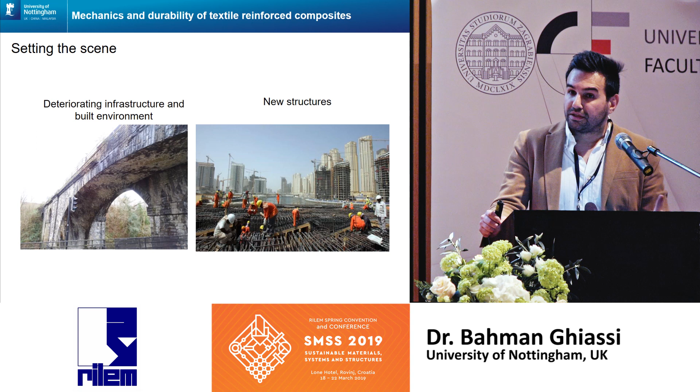We are all aware of the two big and important challenges of the construction sector today. One is the deteriorating infrastructure and built environment, and we need innovative and effective strengthening and conservation strategies so we can extend their life and ensure their safety. We also have new structures and growing construction development, especially in developing countries. For both of these challenges, we need new materials, efficient materials, and sustainable materials.

Considering recent sustainability, durability, and resilience considerations, we need to be sure that these materials are cheap, sustainable, durable, and available locally and globally. This is, I think, one of the biggest challenges of the construction sector at the moment.

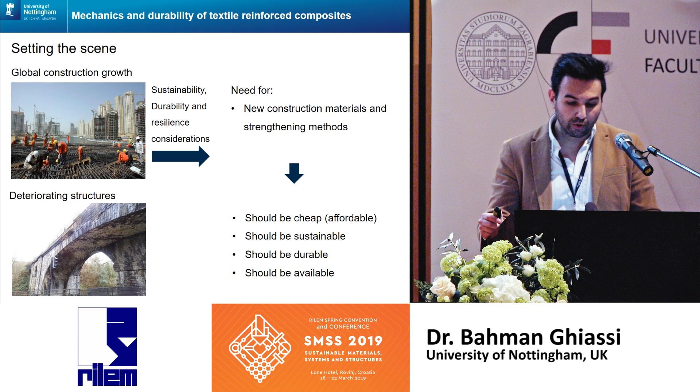For that, happily, we have several new opportunities and new materials. We have alkali-activated materials - there are a lot of RILEM committees on this topic and on their durability. We have blended cements, fiber-reinforced concretes, and textile-reinforced mortars. So we have a lot of options at hand at the moment.

But all of them share some challenges - the variability of the properties of these materials. All of them have a wide range of variability in properties, which makes it difficult to control the durability and quality. Also, there is a lack of understanding of durability of all these materials. That's the reason there are a lot of RILEM committees and a lot of articles and publications on these subjects during the last years.

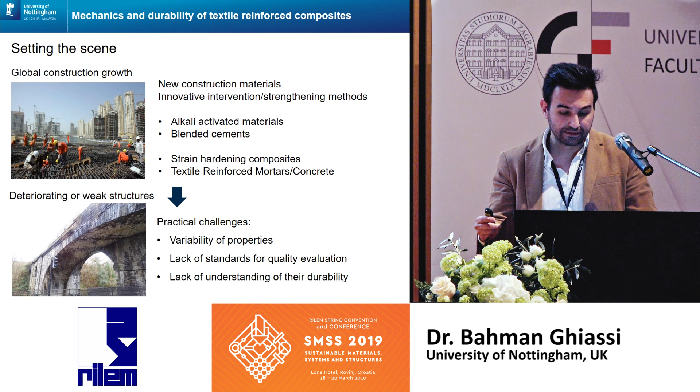If I want to talk a little bit about textile reinforced mortars, which I personally worked on and used for strengthening of masonry structures - but these materials are also applicable for construction of new structural elements, such as light shell elements. So it's not only limited to strengthening applications.

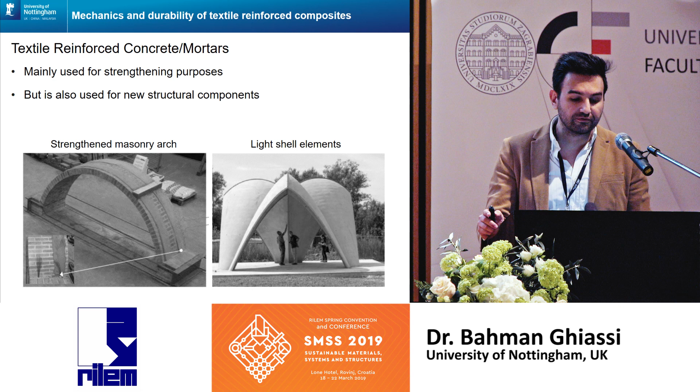So what are textile reinforced mortars? We have a similar thing in fiber reinforced concrete, but the difference is that fiber reinforced concrete consists of short fibers. Textile reinforced mortars are usually long fiber grids embedded in an inorganic matrix that make the final composite material, which we call textile reinforced mortar, or fiber reinforced cementitious matrix, as it's also called in the literature.

We have a wide range of textile types and variations - glasses, steel, basalt, natural fibers - and they come in all ranges of configurations: unidirectional, bidirectional, welded, woven, 3D, auxetic. So there's a large range of fibers available in the market at the moment and being used in practice.

Then we also have a large number of matrices - cements, geopolymers, which are usually used mostly for application to concrete structures, and limes and pozzolanic limes with short fibers, which are more interesting for application to strengthening of masonry and historical structures. As you can imagine, combination of these two leads to a wide range of mechanical properties, durability, and quality, and makes it very difficult to control.

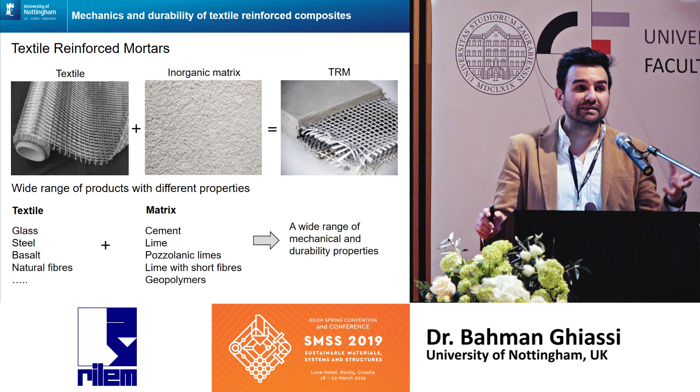And if you think about using this for field application, there are more complexities at hand - the substrate condition, the on-site application condition, the workmanship, the curing conditions. All these can affect the performance of these materials. And we don't know if we apply them today, are they going to work as we want or expect or not?

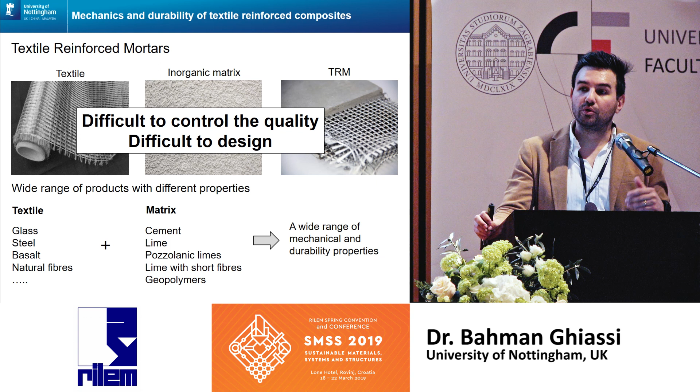So the question I asked myself, and we asked ourselves before we started this research, was: can we control or predict the performance of these systems in service? Can we understand how all these parameters can affect the performance of this strengthening system during the service life of the structure?

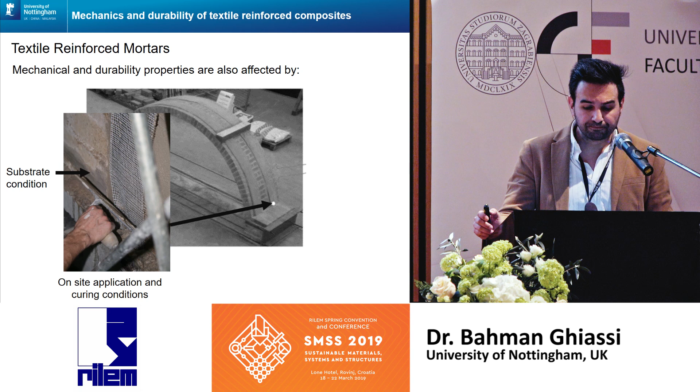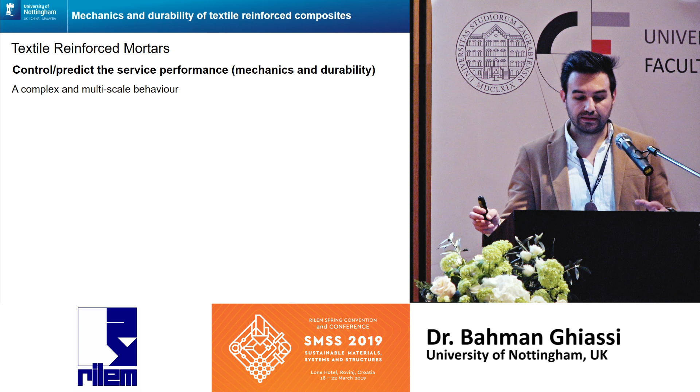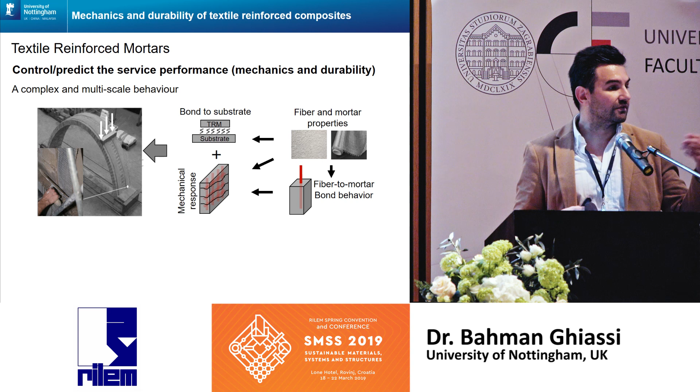To answer that, we have to pay attention that this is a highly complex, multi-scale problem. If you look at the structural application, we have the mechanical response of textile reinforced mortar and its bond with the substrate that controls the behavior of the strengthened system. If you go a scale below that, we have the mechanical properties of the fiber and mortar.

And the interaction between them that controls the behavior at the upper scale. If you go a little bit further inside that, we have the chemistry of the binder and the fiber, and the interaction between them, the transport properties of the binder that control the mechanical response, and finally the durability as well. So if you want a clear understanding of how these materials work in practice, we need to really understand all these scales and how they are linked to each other.

And then we have also the effect of processing method, the effect of curing method, and the effect of environmental conditions, each of which can have effects on some of these scales and globally affect the performance of the final structure that we have.

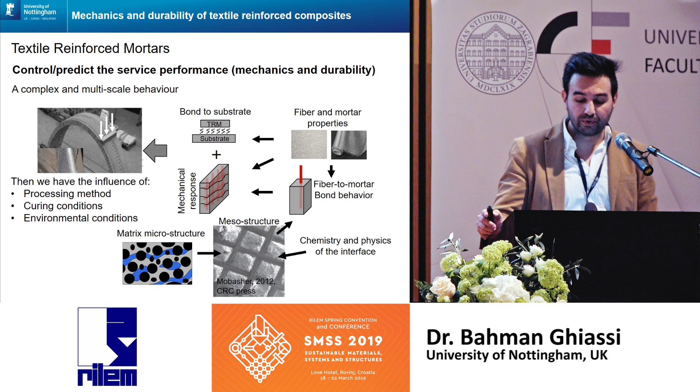So if you go to the literature, we see a quite large number of studies on this topic, on the mechanical characterization of textile reinforced mortars and their application to masonry structures. I think the most notable one is the experimental results of the RILEM TC250 CSM, which I also had the honor to be involved in and work on.

The rest of the studies, as I said, mainly cover the larger scale testing and the mechanical characterization and structural characterization tests. Because we are structural engineers, we only care about what is the tensile strength, what is the fracture properties of our material, and then if it's working well in practice or not.

So there is really a lack of standard testing methodologies at a smaller scale for these materials. There is a lack of studies that combine all these scales together to clearly understand how the behavior is affected. There is a lack of material-structure-property links in these systems. And also there is really a lack of durability studies on these systems.

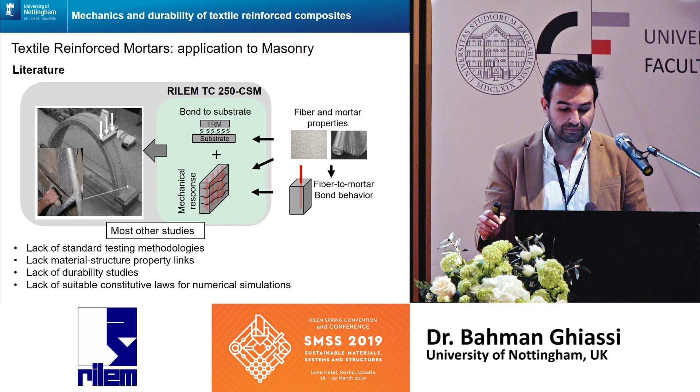I know there have been a very few recent studies on this topic, but we still need to do a lot more research. The available studies are really, really few at the moment.

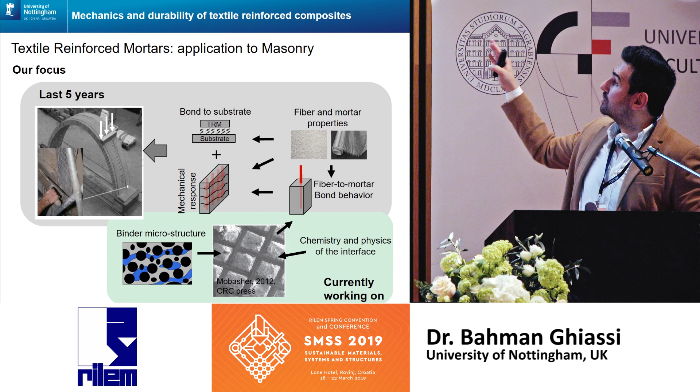So what we have been trying to do was actually to cover this gap and try to somehow connect all these scales together. In the last 5 years, we have been focused on the upper rectangle, the gray one, and we have been trying to connect the fiber and mortar properties to the structural performance in the field. And now currently we are trying to connect that to the chemistry of the material at the local scale.

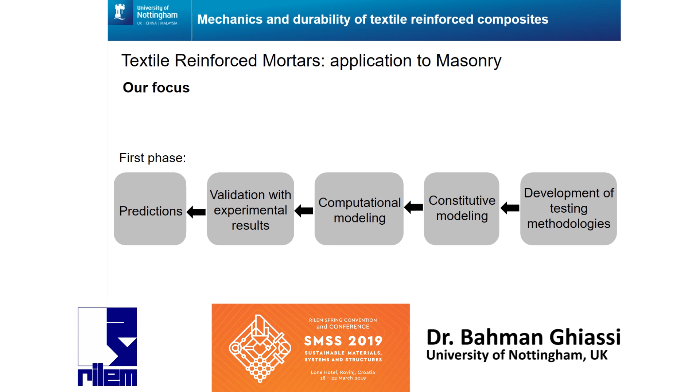So I was thinking how to organize this research and give a brief overview of what I've been doing, and I thought maybe the best way is to divide it into 3 phases. The first phase was really working on developing a consistent testing methodology so that we can test these materials from the material level to the structural level.

And then use these testing methodologies to extract the constitutive laws that are applicable in numerical simulations, then validate and develop computational tools that are able to predict the response of these systems at the structural scale, validate them with laboratory small scale testing, and then use that tool for predictions. So this was the first stage that I'm going to give a very brief overview of.

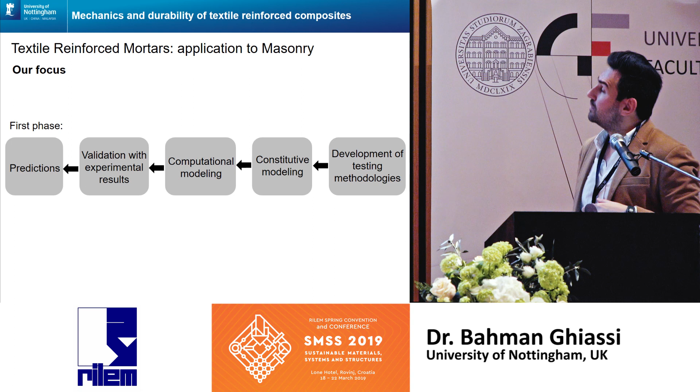So we have developed several test setups at different levels. Material testing is very standard, that doesn't need any development. But we have developed several test setups for fiber to mortar pull-out characterization.

Then we have developed our own tension stiffening test setup for tensile characterization of textile reinforced mortars, and then we developed our test setups for evaluating the bond between textile reinforced mortar and the substrate, and then also to go to the structural scale and perform the structural scale application.

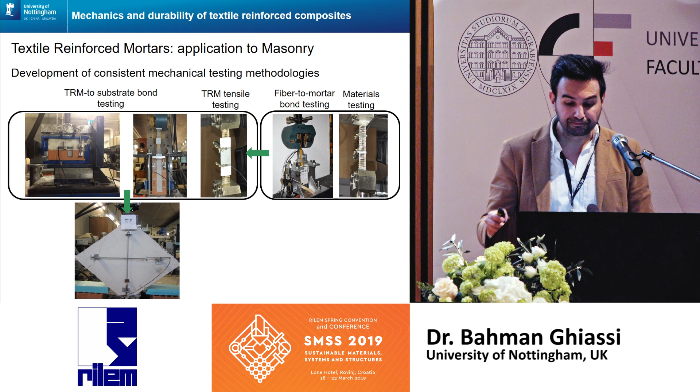So somehow we have been trying to connect all the scales in a consistent way, to make sure that the loads are applied consistently across all the scales of testing. And once we had these test setups, we evaluated the performance of a wide range of textile reinforced mortars, different fibers and types of mortars, and also different fiber configurations—unidirectional fibers, bidirectional fibers.

We investigated how these combinations of fiber mortar types can affect the performance at the local level and at the structural level. For example, I'm showing here some results of pull-out tests showing how effective bond length, for example in glass fibers embedded in pozzolanic lime, can change, or how transverse fibers in bidirectional fibers can change the pull-out response significantly. These observations should be considered in the constitutive laws we are developing later on.

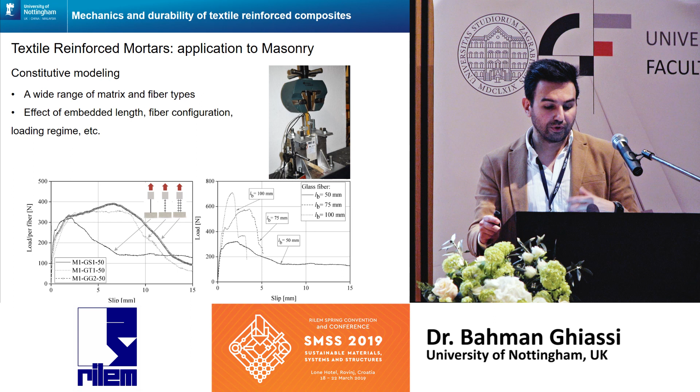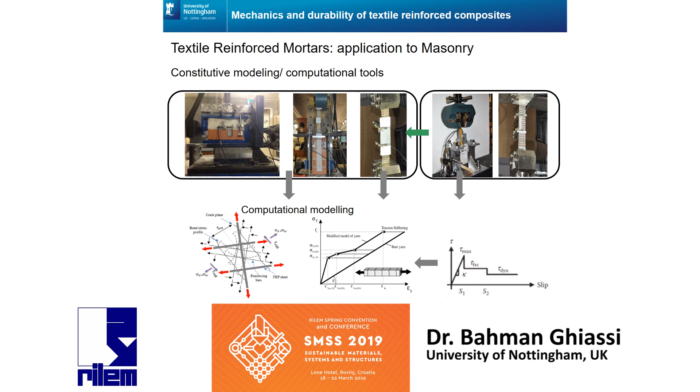Having a wide range of testing on different combinations of fibers and mortars, we developed constitutive laws for the pull-out response of the fiber to mortar behavior, and then used that for upscaling to the tensile response, validating it with experimental tests, and then using that information as the input of a computational model that can predict the response of structural elements strengthened with these materials.

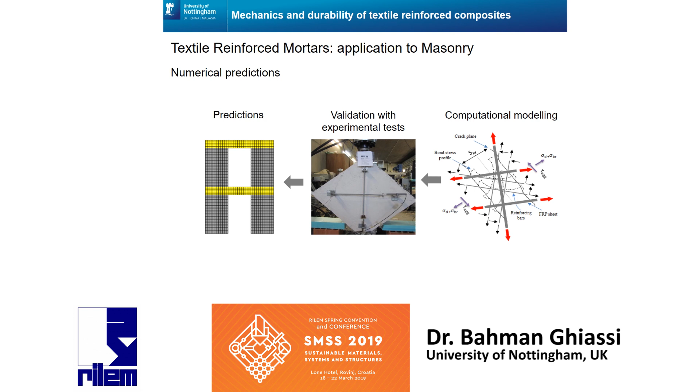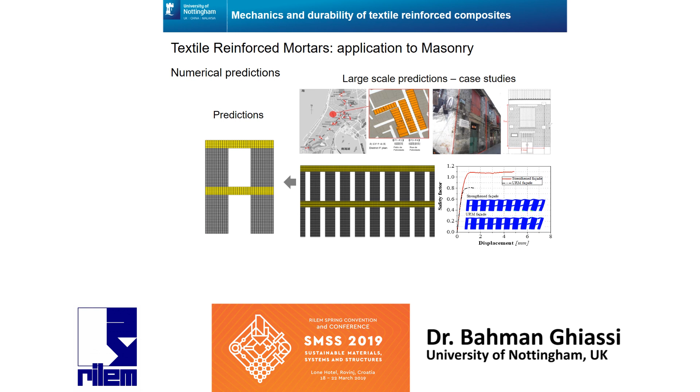Our predictions were not only at the single building level, but we also went a little bit larger, at the more global scale. Today we can predict the response of masonry facades, large facades strengthened with these composites.

In summary, what I tried to show you is how we went from the fiber to mortar bond behavior and mortar properties to the structural performance. This was the first stage of the studies we did.

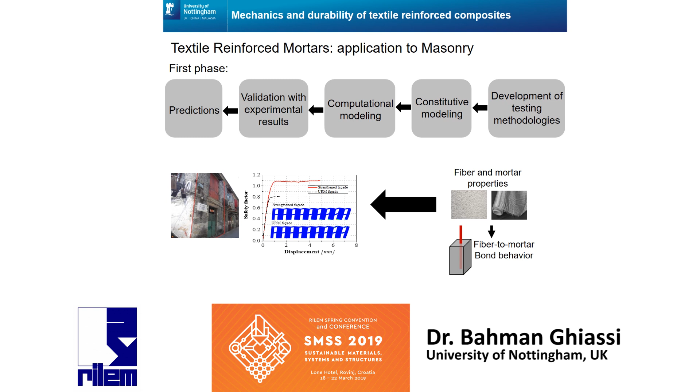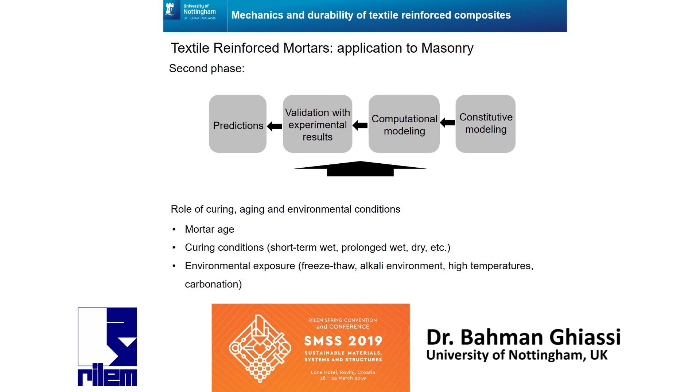In the next stage, which is a continuous process at the moment, we are trying to understand the role of all those parameters I talked about in the beginning on this whole range of behavior. So how mortar age or curing, or environmental conditions, can affect the performance of these systems through all the scales. As an example, we investigated the role of curing.

If we cure the mortar in a dry environment, a short wet environment, or a prolonged wet environment, which is very sensitive in real applications because you cannot really control the curing conditions. So what happens if you apply this material on a dry day or a wet day, and how that affects the performance at the structural level, is important.

For environmental conditions, we are investigating the freeze-thaw behavior, alkali environment, high temperatures, or even carbonation effects on the performance of these systems through all the scales.

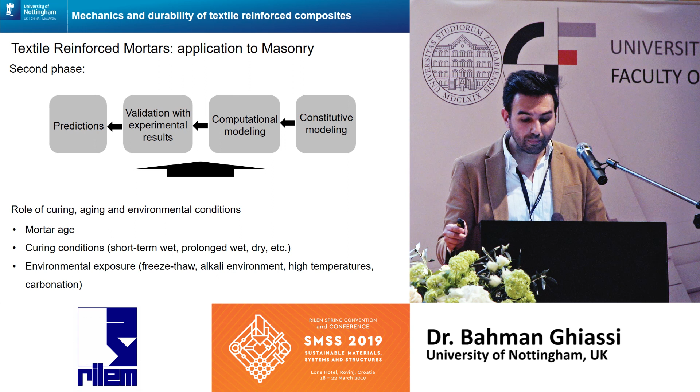Just to show you an example, I'm showing here the pull-out response of steel fibers embedded in mortar, and it shows that the curing condition can significantly affect the pull-out response of the fiber, which consequently affects the bond slip laws that can affect the tension stiffening of the strengthening system, and then the performance of the whole structure at service.

The mortar age can also have a significant influence on the pull-out response. This shows that maybe the 28-day testing procedure we have been following from cementitious studies might not really be applicable to these materials and to these pozzolanic limes. So maybe we need to find new standards and new testing methodologies for these materials.

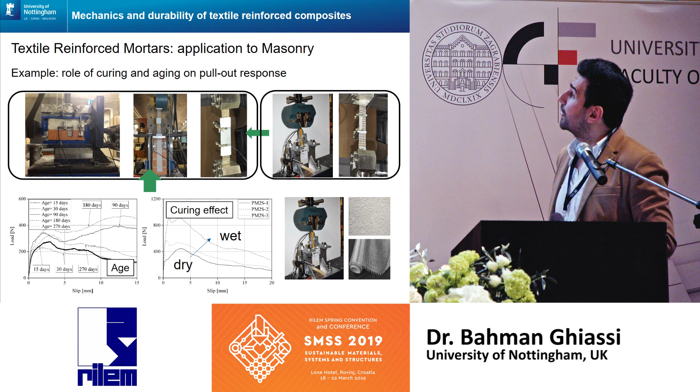At the moment we are trying to couple these results with material science experimental testing so that we can better explain the reasons for these changes that we observe.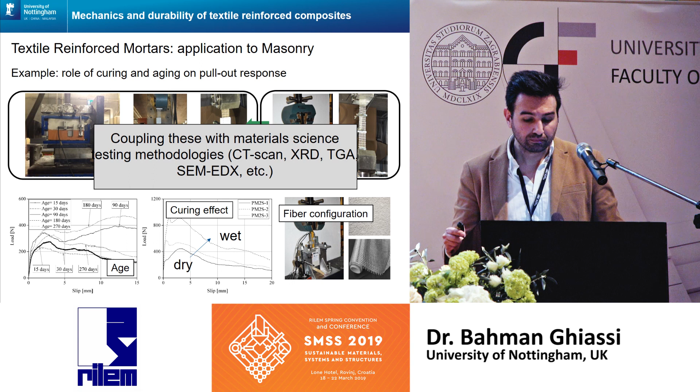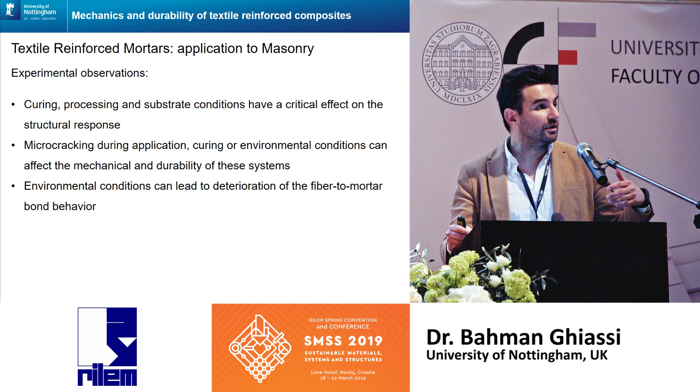A short overview of what we have been seeing: curing conditions, processing and substrate conditions can have a critical effect at various scales on the performance of these composite materials. Microcracking and deterioration of the interface between the fiber and mortar are the most common deterioration mechanisms that can happen because of these issues and under different environmental conditions.

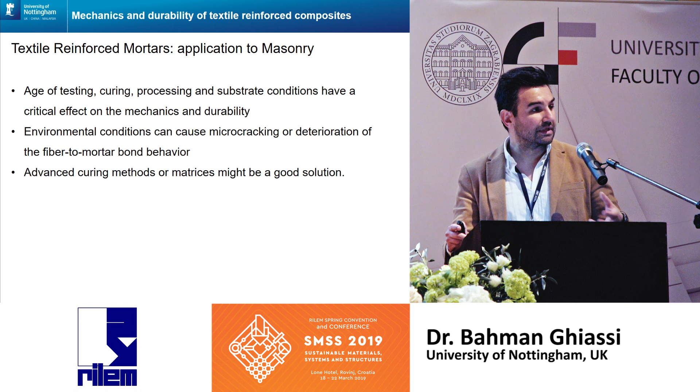So this we know. At the moment we are trying to develop computational tools that can also simulate these deterioration mechanisms, coupling it with the previous computational models we have, so that we can somehow optimize the repair design of these systems at the beginning, in the design office, considering the properties of the materials, the environmental conditions, and the application procedure that is going to be used.

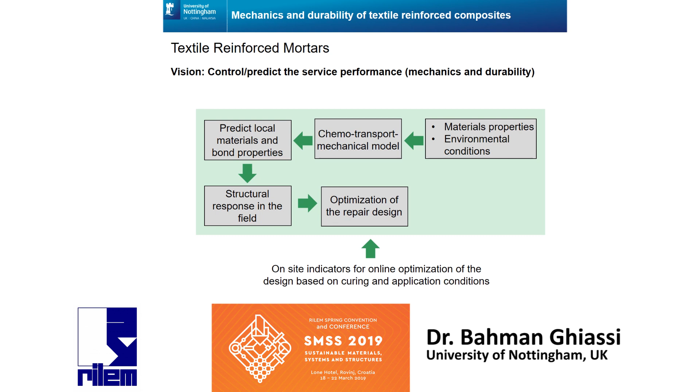In the future, we are also trying to see if we can use some on-site indicators so that we can monitor online the curing conditions and the properties of the material, so that in an online manner we can update the design of the system to take care if something is going wrong during the application, or if the conditions are not appropriate enough, we can update our design strategy and application.